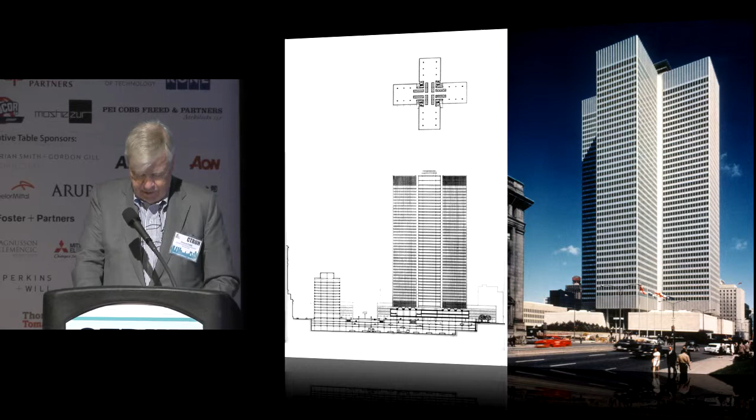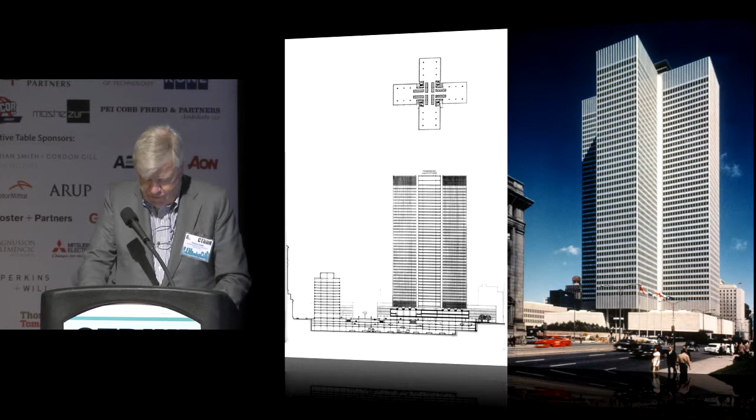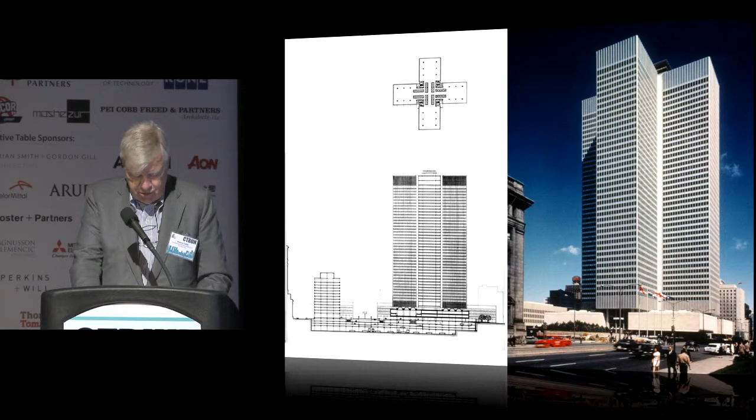When completed in 1962, the Royal Bank of Canada Tower in Montreal, the first tall building, indeed the first building of any kind for which I was principally responsible as an architect, was the largest and tallest such building in Canada. Aside from taking note of its clearly derivative and oddly hybrid character, a body by Le Corbusier decked out in Miesian drag, two remarks may be made about this early work. First, that it adheres strictly to the modernist conception of a tall building as a resolutely autonomous, self-referential organism shaped entirely by its own internal needs and systems.

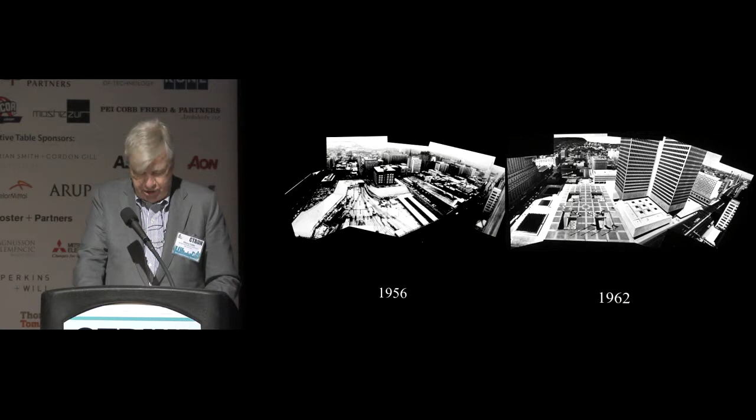And second, that this huge urban development project of which this tower is the centerpiece, embracing more than 7 acres of land above Montreal's central railway station, was precisely the kind of opportunity to which I was in my youth most strongly attracted. That is to say, a building project of a scale that invited radical reordering of the spatial, volumetric, and circulatory systems of the city.

It was, of course, gratifying to the ego of a young architect to have his very first building appear on a postage stamp, together with the Cathedral of Montreal. But in truth, the only aspect of this tower that I can still consider worthy of note is not the way it meets the sky, but the way it meets the ground. A levitational inversion of solid and void that proclaims the tower's active engagement with the space of the city at street level.

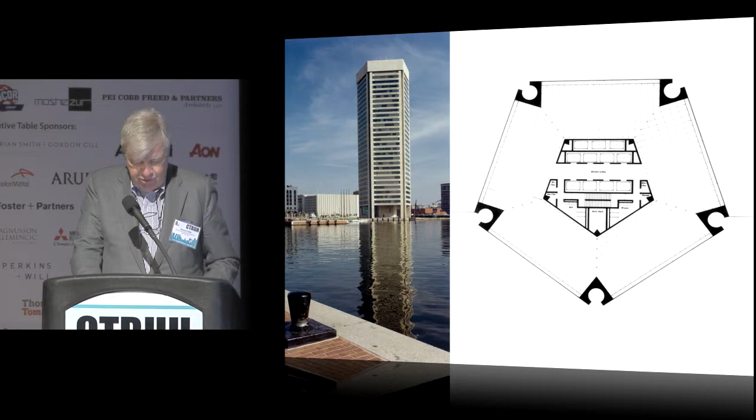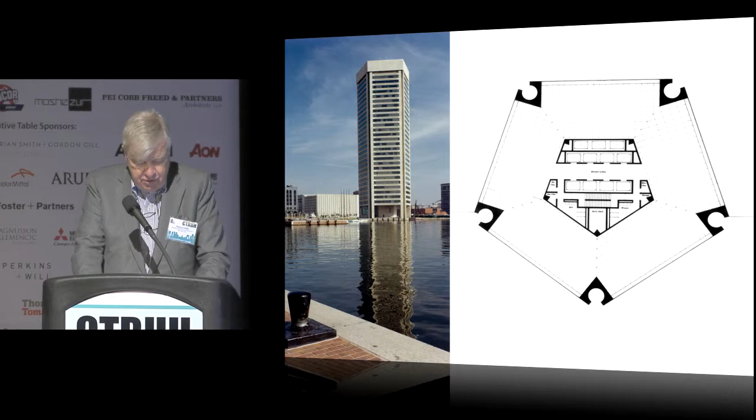The World Trade Center in Baltimore, completed in 1977, exemplifies my firm's exploratory work with cast-in-place concrete during the 1960s and 70s, wherein our goal was a monolithic architecture that would be complete once the concrete had been poured. In this case, the harborfront location suggested a pentagonal plan form that presents a broad face to the street on one side, while its prow engages the water's edge on the other. Claw-shaped columns frame long-span beams on each of the tower's 5 sides.

The floor plan of the John Hancock Tower in Boston, completed in 1976, exhibits for the most part a rigorous adherence to the discipline imposed by those characteristic internal systems, structural, mechanical, circulatory, operational, that largely determine the design of every tall office building. But we may observe the presence of one feature that seems to challenge the hegemony of internal systems, namely the skewing of the end walls so as to produce a notched rhomboid rather than a rectangular plan form.

While this deviation has been accomplished in a way that is coherent with systemic elements of the plan, it nonetheless cannot be explained by reference to any identifiable internal need. A yet more pronounced aberration occurs in the plans of the lower 8 floors, where one long side of the rhomboid has been rotated outward to form a trapezoid.

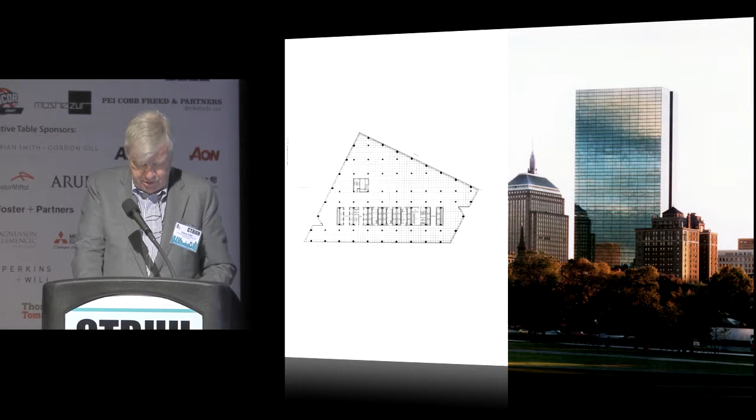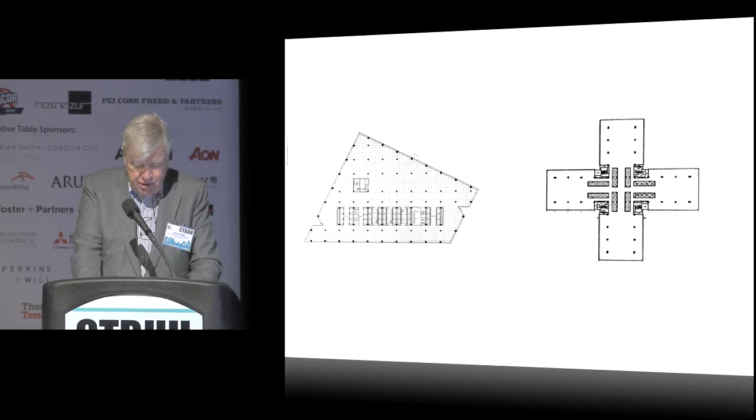This peculiar form, so radically different from the undisturbed autonomy of the cruciform tower in Montreal, becomes explicable only when one turns finally to the site plan and sees the building in its urban setting. The rhomboid tower rising from its trapezoidal base is then immediately perceived as a response to the particular external situation of the building, most notably its adjacency to Copley Square and H.H. Richardson's Trinity Church.

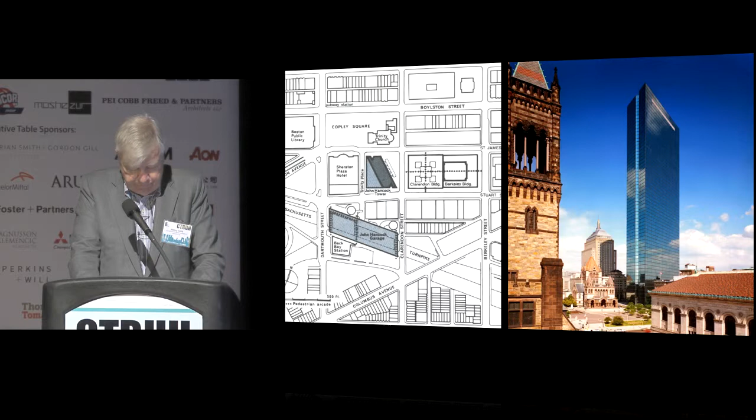The extreme disparity in size between the tower and the church was, of course, the central predicament we faced. We chose to deal with it not by creating a gratuitous distance between the two. This would only have exacerbated the problem, but by bringing them into close proximity while positioning and shaping the tower in such a way that it becomes the contingent satellite and the church the autonomous center in the composition.

As the foregoing suggests, we adopted a strategy of minimalism in the design of the Hancock Tower, not for ideological reasons, but because the situation of the building demanded it. In the determined pursuit of our goal, to achieve a symbiosis between the church, the tower, and the square, we excluded everything that did not contribute directly to this end, for we believed that only thus could we temper the inherent arrogance of so large a building and endow it with a presence that might animate rather than oppress the urban scene.

Fountain Place Tower in Dallas, completed in 1986, utilizes a strategy of folding to exploit the sectional possibilities of the double square diagonal that is the distinguishing feature of the Hancock Tower's plan. In this instance, the form thus produced presents dramatically varied profiles when seen from different points of view, creating the illusion as one moves around it that this huge monolith, 60 stories high, is itself in motion, as if performing a dance.

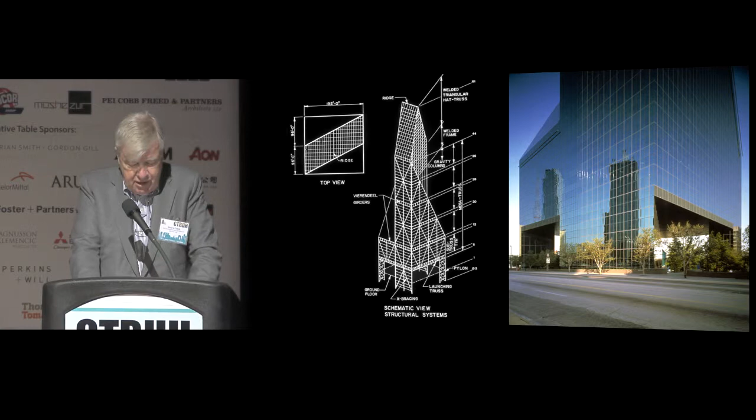The diagram on the left shows how the tower's diagonally braced structural frame allows one half of its floor area to be cut away for a distance of 60 feet above the ground, so that a densely forested water garden at its base can flow right through beneath it. An act of citizenship that animates the space of the city at street level, just as the tower's profile animates its skyline.

At a height of 1,018 feet, Library Tower in Los Angeles, completed in 1989, just barely qualifies as super tall under this council's definitions, but it remains still the tallest building in North America west of the Mississippi. Like the Hancock Tower, this skyscraper overlooks an architecturally significant neighbor, Bertram Goodhue's wonderful Central Library. Concern for this adjacency led us to adopt a complex planimetric geometry that governs a stepped building form terminating in a multifaceted crown atop a tower whose volume expands as it descends and finally dissolves at street level into an array of prismatic glass columns.

Presumably on account of its proximity to Hollywood, this tower seems to have been an irresistible target for the makers of disaster films. It was the very first of a great many buildings to be vaporized in Independence Day, and later performed flawlessly in the climactic scene of Dragon Wars.

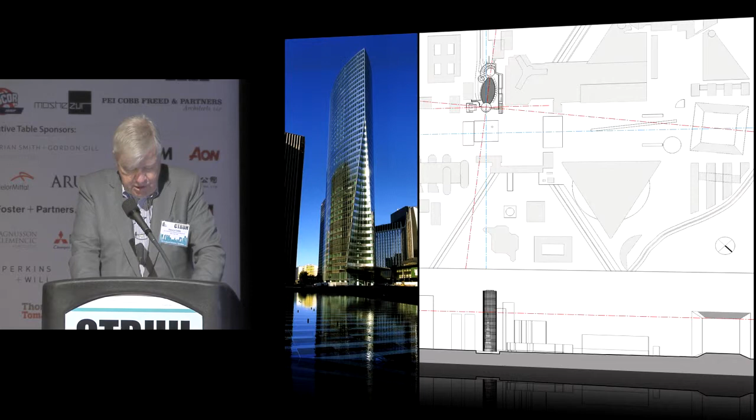Tour EDF, completed in 2001 in La Défense on the outskirts of Paris, is another example of my ongoing effort begun with Hancock to transmute the office tower from an autonomous into a contingent presence by deforming it in such a way as to make it responsive to the specific character of its urban context. In this case, the building's prow, located precisely on the skewed centerline of the Grande Arche, is cut away by means of a conical incision so that the tower makes a gesture toward the historic monument in front of which it stands.

At the base of this incision, a circular marquise, 25 meters in diameter, creates a gathering place where passers-by are invited to pause and enjoy the axial view of the Grande Arche from a sheltered vantage point beneath the generous canopy of stainless steel and glass. Thus does this entirely private building, it serves as headquarters for Électricité de France, become the occasion for shaping a memorable public space.

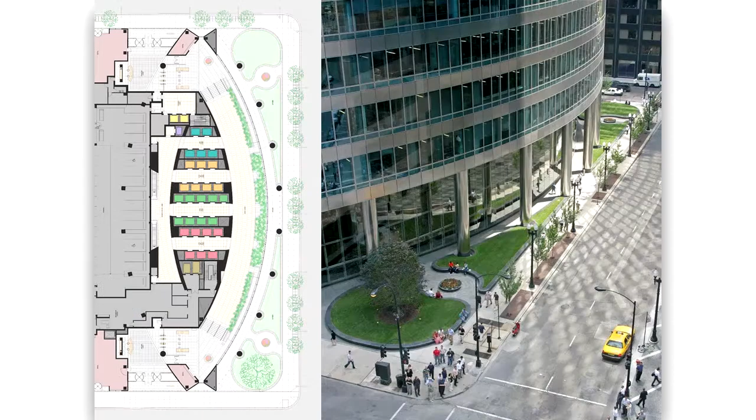Though hemmed in by neighboring Chicago skyscrapers, Hyatt Center, completed in 2005, is liberated from this confinement by curved perimeter walls that open up angular views from its interior, while at ground level, the colonnaded south face frames a block-long garden that offers welcome respite to commuters traversing a much-traveled path between the rail station and the loop.

Torre Espacio, completed in 2008, is the northernmost of 4 towers, each designed by a different architect, that have risen at the northern end of the Paseo de la Castellana in Madrid.

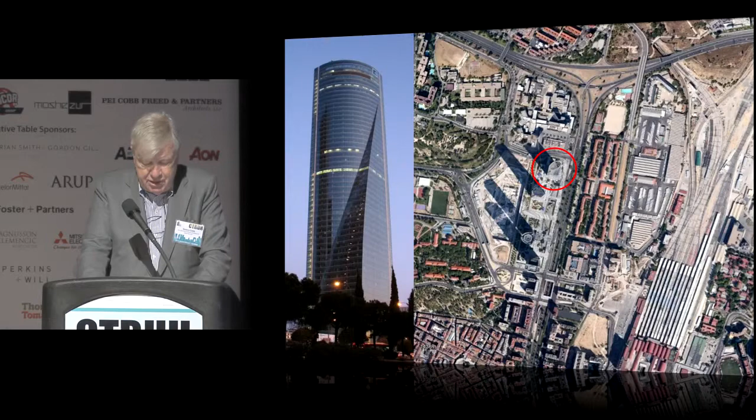Like the tower in Dallas, this building presents varied profiles when seen from different points of view. Torre Espacio evolves from a square in plan at its base to a curved lozenge formed by the intersection of 2 quarter circles at its crown. The parametric function for accomplishing this evolution in a constructible form is the cosine curve described in the diagram on the left, which rationalizes the points of intersection between the 2 curved surfaces and thus facilitates fabrication and assembly of

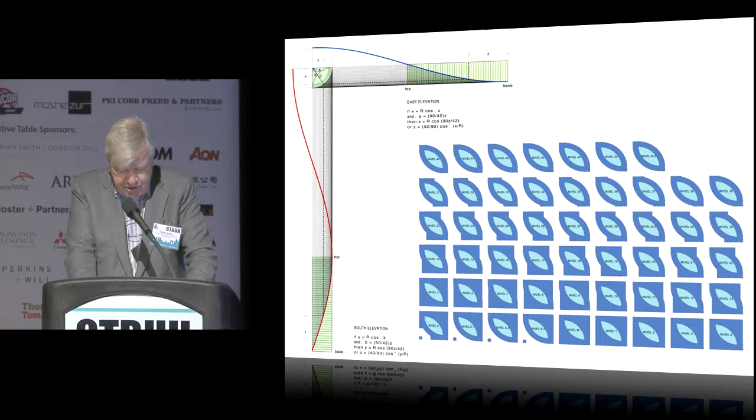the curtain wall. The size and shape of each office floor, as shown in this array, is different from every other, a feature unacceptable to most American developers, but embraced with enthusiasm by our client in Madrid, who declared it to be, quote, very Latin.

An important characteristic of the cosine curve is that its rate of curvature is not constant, but rather decreases gradually as it rises from base to crown. This gives the resulting tower form its distinctive sense of lift, almost as if it were a living organism that had sprung from the earth on which it stands. At street level, the square volume is cut away to form a generous porch within which the lobby is shaped by the same quarter circle that then emerges in the body of the tower above.

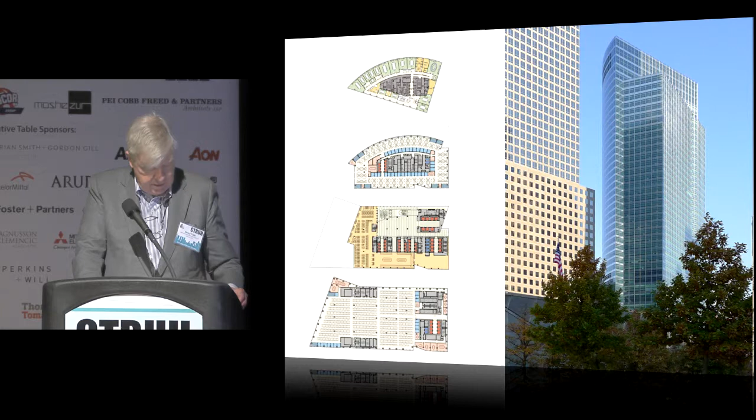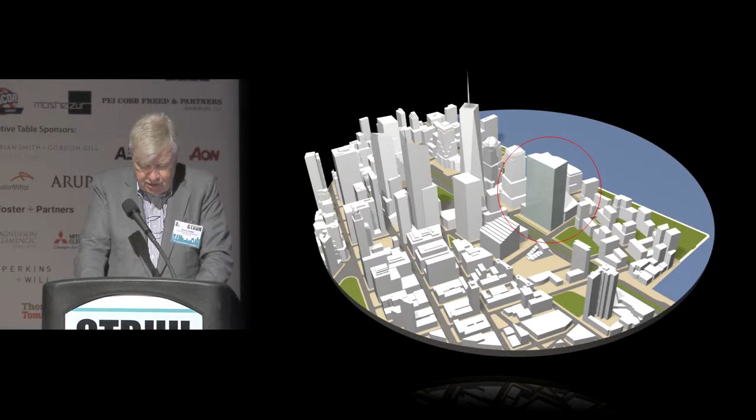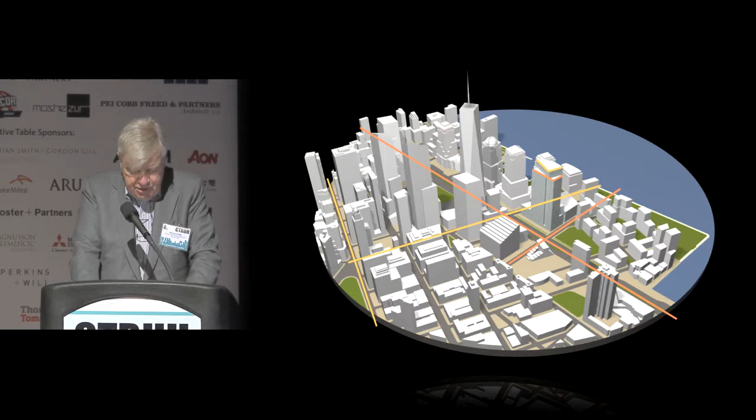Searching for a way to animate this lifeless hulk without depriving our client of the very large floor plates it required, we began by noticing that Broadway and Vesey Street define one urban grid, West and Murray Street another, and both grids intersect to form the boundaries of the building site. We then seized on this circumstance to generate the formal articulations that help enliven the tower's volume on its eastern side. These, combined with the shaping of its western face into a sweeping curve, are the modest but nonetheless effective means by which this tower acquires a presence that is palpably responsive to its specific place in the urban fabric of Lower Manhattan.

In doing so, it emulates and affirms a familial bond with its charming neighbor, Ralph Walker's wonderful Barclay Vesey building, which so ingeniously celebrates the circumstances of its location that it inspired me to do the same in a building project that also provided an opportunity to embellish the public realm at street level with a block-long glass canopy sheltering and animating a much-traveled adjoining passageway.

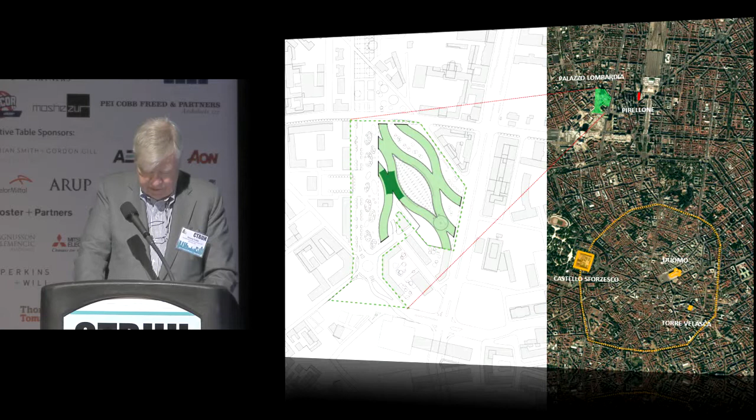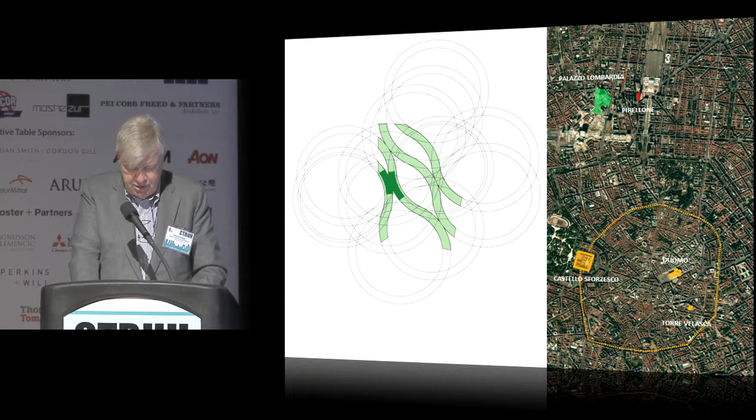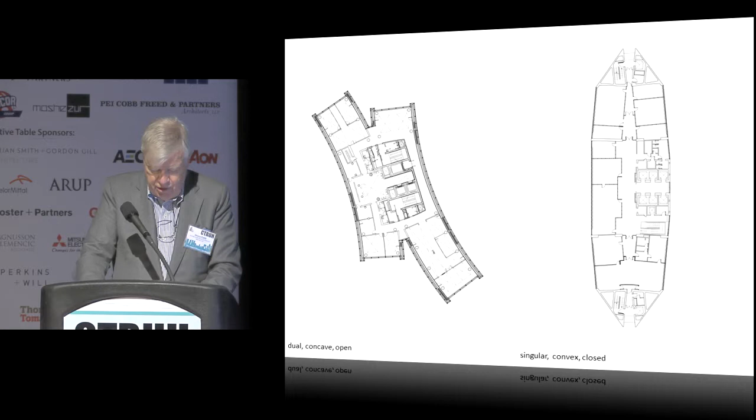Palazzo Lombardia in Milan, completed just last year, is the new seat of government for the Lombardy region, located not far from that city's most famous skyscraper, Gio Ponti's Pirellone. A slender bifurcated tower emerges as the fragmentary vertical extension of sinuous intersecting strands of linear office space, themselves fragments of 11 identical circular rings that comprise the main body of this large mixed-use building. Our tower thus assumes a form that is dual, concave, and casually composed, contrasting with and deferring to the singular, convex, resolutely autonomous volume of its distinguished neighbor.

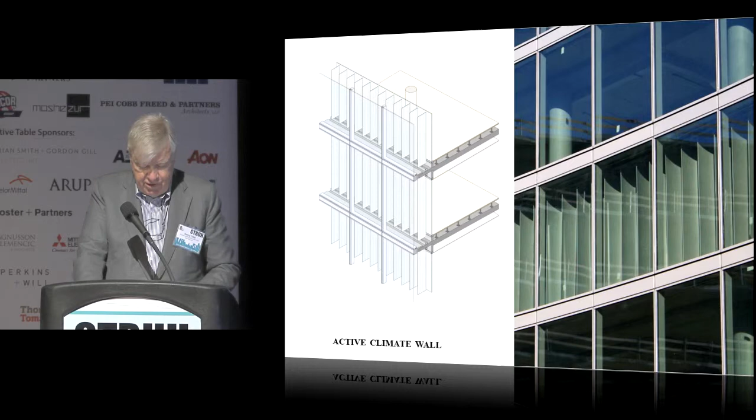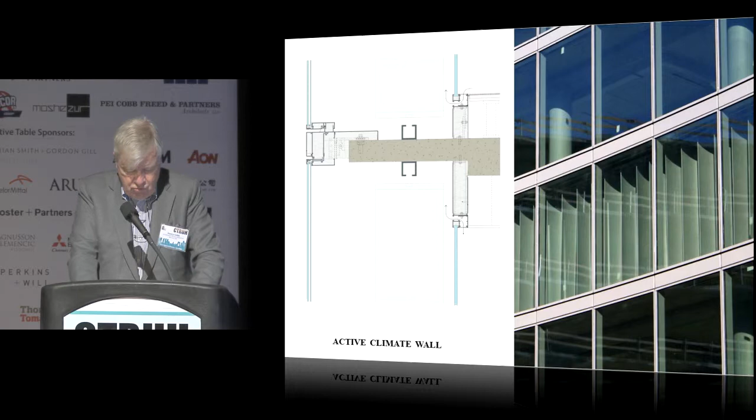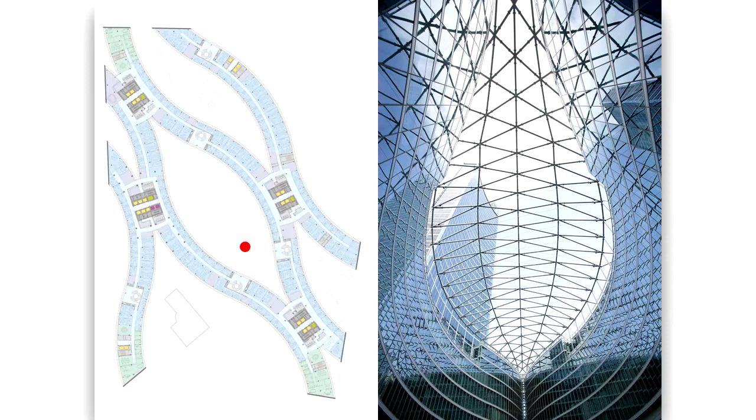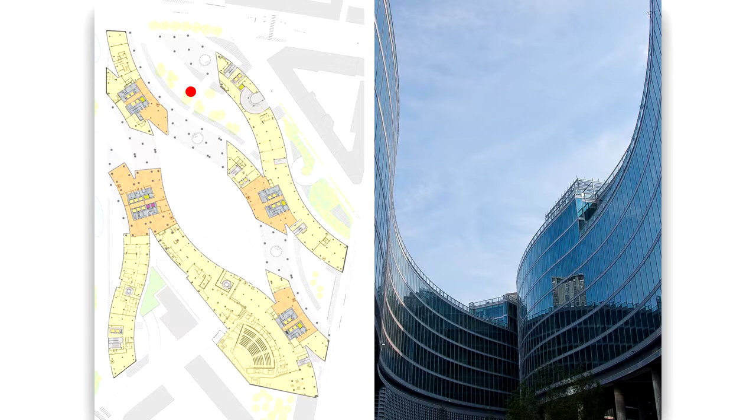The complementary and contingent status of our tower is further enhanced by the character of its enclosure, an active climate wall composed of 2 layers of glass separated by a 1 meter wide space within which vertical louvers provide efficient sun shading while allowing maximum transparency of the building envelope. Like the tower's form, this double wall is an extension of the surfaces below that enclose the low-rise office floors and shape the central piazza, together with ancillary public spaces inviting access from the surrounding street at street level.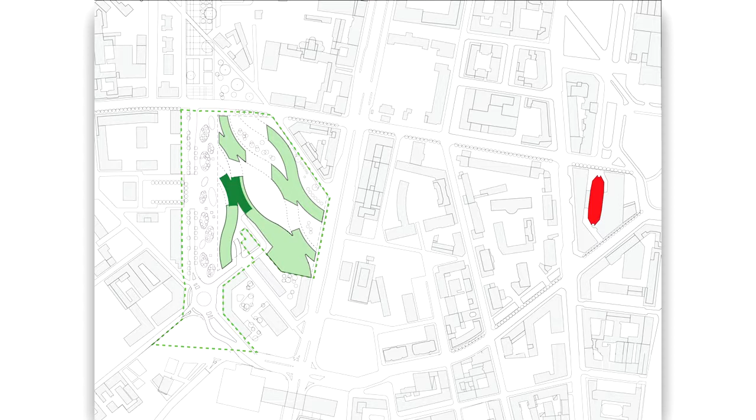Placing now the ground floor plan of Palazzo Lombardia into its larger urban context, we can see how the concept of interweaving strands has sponsored a formally coherent transition from tower above to podium below, and thence to the sequence of street-level open spaces that join the central piazza seamlessly to the city around it. A transfiguration is thus accomplished from emblematic object on the skyline to emblematic space at street level.

In the foregoing survey, I have touched briefly on 10 tall buildings constructed in 10 cities across 5 decades. Diverse as they are in form and setting, all 10 bear witness to my lifelong preoccupation with the question of how such buildings can be so conceived as to enliven not just the skyline, but more urgently, the space of the city. From the earliest of my built works to the latest, this question has remained for me central to any consideration of tall buildings in the urban habitat.